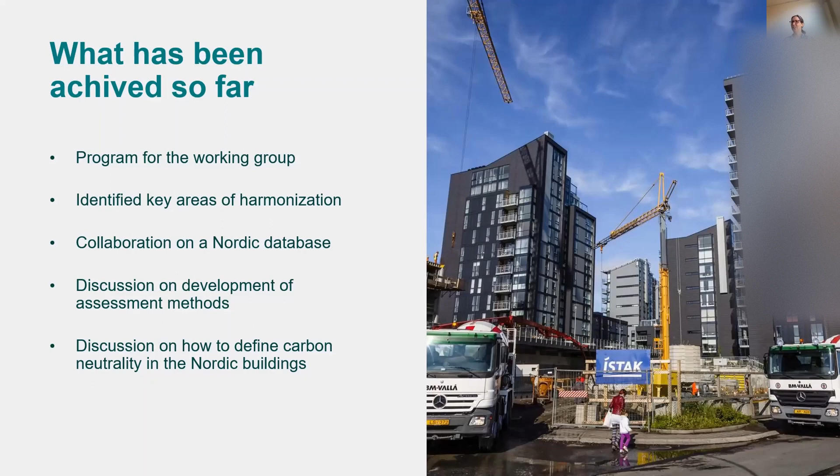Just start sharing my screen here. Like that, I hope you see it well in the right mode. It looks good. Perfect. So thank you very much for inviting me, and hello everybody, nice to be here today.

I will talk about this ongoing project we're working on for Boverket on reference values for climate impact of new buildings. We started this work in the autumn, and we won't actually have a report until the end of September, so we are in the middle of our analysis right now. I have not promised to show, and cannot show, any sharp results from this study yet, but I hope to provide you a good description of the project, and an understanding of what will be the output of this project anyway.

The main aim was to develop and propose a methodology for reference values regarding climate impact for new buildings, and also collect background data on buildings to be used for this development, and propose reference values. We have multiple aims with these reference values: to provide support for setting climate requirements in procurement beyond legislation, to create a baseline for following up climate impact on new buildings over time in the Swedish context, and finally to provide a basis for limit values if they will be connected to the coming climate declaration regulation.

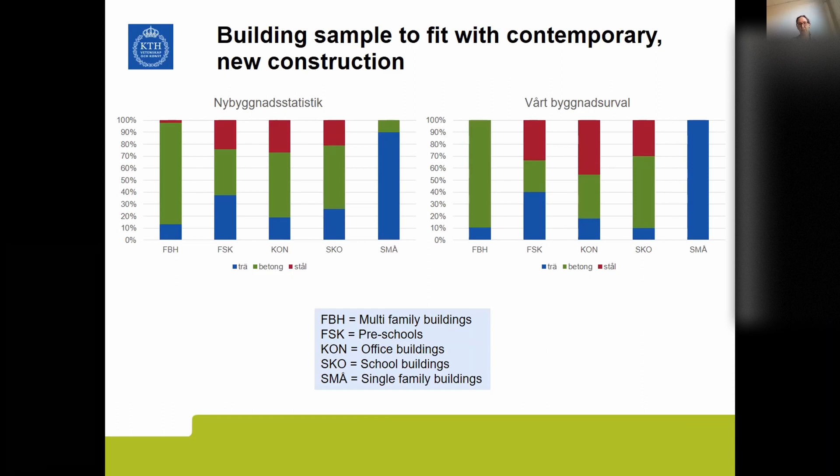In the work we have also looked at the current statistics of how new construction looks like, because we had an idea that if we see our sample become biased in some way, maybe we need to work with trying to adjust the reference values. In the end, we managed to include 4 timber preschool buildings here to make sure it's more representative of how current construction looks today. But this is just an example here I show.

So what will the reference values represent then? In this current project, we are only looking at the life cycle modules A1 to A5. The reason for that is, of course, that this is the main focus of the coming climate declaration regulation, so this is of most interest now to have a closer look at. But we have material, so it's possible to also calculate other life cycle stages later on. In the current project, until September, this will be the focus.

We are working with 2 system boundaries for building parts or building component coverage. One is the system boundary that the coming regulation will have, how it looks like when introduced in 2022 - main building elements, so the load-bearing structure, climate shell, inner walls, and potential basement and garage. But we are also looking at a system boundary to represent a more complete inventory of the entire building, which has also been proposed as a suggestion for developing the climate declaration regulation in 2027. Here it's primarily to add interior finishes and technical installations into the calculations.

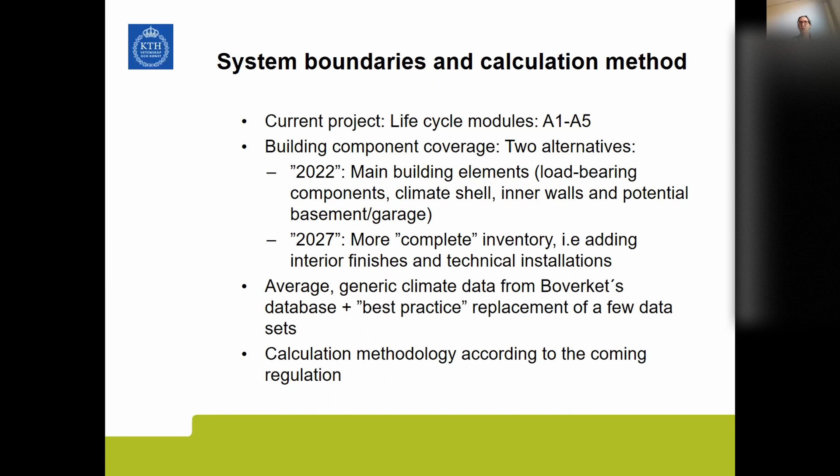We are also making a calculation that we call best practice - one way of trying to set up a representation of what can be done already today. This is done by replacing a few of the data sets here with greener alternatives. Apart from that, the calculation methodology follows the coming regulation.

So I will stop a little bit to talk about the background data here, because actually this project has had a very high focus on compiling and processing the background data, that is the building inventories for the calculations. We had a very high focus on trying to establish a uniform and high quality data set and methodology, to really make sure we have control over the background data to the highest extent possible, and also the possibility to set up the same calculation methodology.

So we have not been asking for ready-made calculations. Instead, we have asked for high quality bills of resources of these buildings. And we also set up very high requirements on these bills of resources from the data providers here.

Here we have asked for them to be based on cost calculation data in the first place, to really make sure that we have very complete inventories, and also as close to as built as possible. This is also done in relation to wanting to set up a method that is really compatible with how this is going to be done later on for the climate declaration regulation.

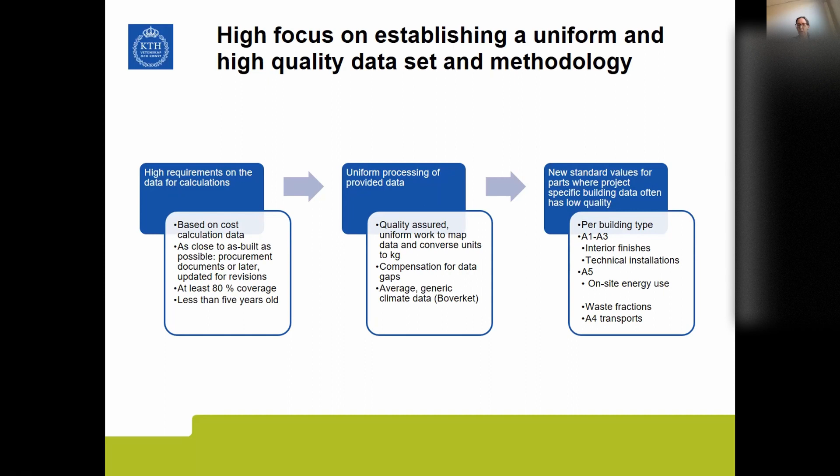So in this work, we have also been developing new standard values for some parts, and this entails interior finishes and technical installations and the on-site energy used in module A5. This is not perfect, but it's at least one step forward in the Swedish context of trying to set up quite solid standard values.

Just to give you some kind of hint here on this quality control process: in the left lower corner here, this was the first graph we took forward, and in the other corner with the blue bars, we have the near-final diagrams for the buildings here.

As you can see, in the first one, we had buildings that were up to 1,200 kilo CO2 equivalents per square meter. And now we have the highest a bit above 400 instead.

So we have had a process where we have really looked neatly into the values, looked into different building parts, and made sure we see that the building parts are filled with information, and also looked at, for example, if the amounts of kilos for different building parts, of concrete for example, seems reasonable, things like that.

To try to set up this process, when we have detected errors, we have always gone back to the data providers to ask them to recheck or come up with revised values, etc.

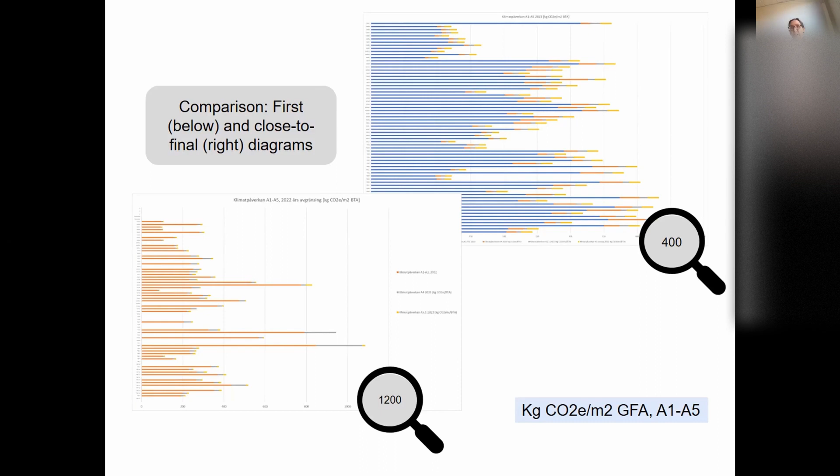All the lessons learned in this data compilation and processing has also been fed into the work at Boverket regarding developing the climate regulation more in detail, and is, I think, important lessons learned for working with how to set up the control in the end of the legislation.

Yes, so of course we can do a lot of analysis now with this data we have. One use of this is to come up with reference values. This is just to give an overview of what I see as the main reference values that will be produced here for Boverket. This will be actual average values for the different building types, and we are looking at these two different system boundaries, 2022 and 2027.

We also come up with this so-called best practice calculation, which means that we can give an understanding of if some of the most important materials were procured in a greener way already today in these buildings, how far can we actually reach improvement here.

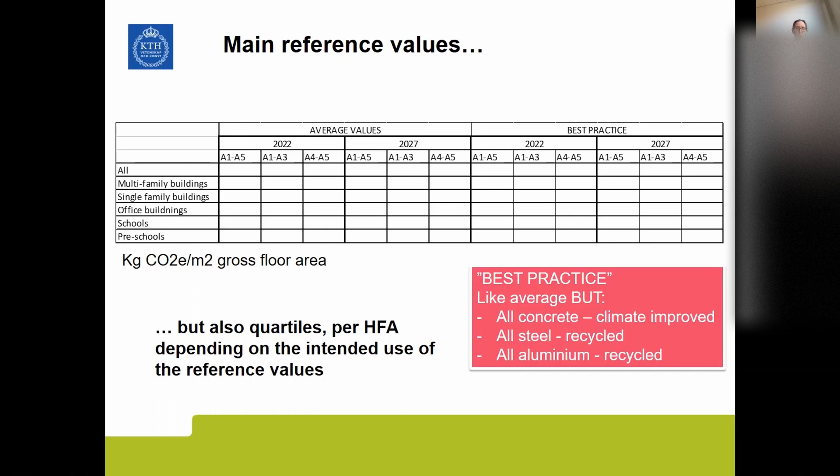But of course, starting for the discussion later on limit values, etc., we can also come up with quartile values, and we also look at per heated floor area. We also made such calculations, for example.

And finally, I will just try to give a preview of some short results and conclusions that we feel we can say already now, which may be of interest for the coming discussions.

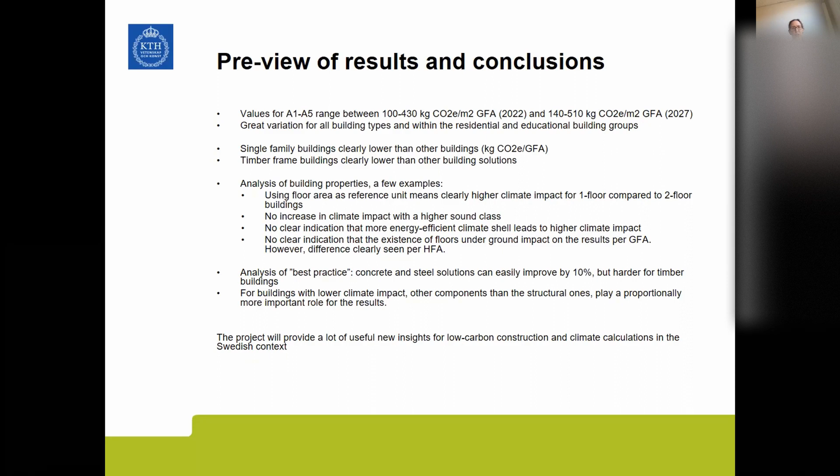Here, the single family buildings clearly come out having a lower impact per gross floor area compared to other building types. And also buildings with a lot of wood inside them come out clearly as lower. Of course, single family buildings in Sweden are built primarily in wood, so that's also a reason for this building type to be a bit lower.

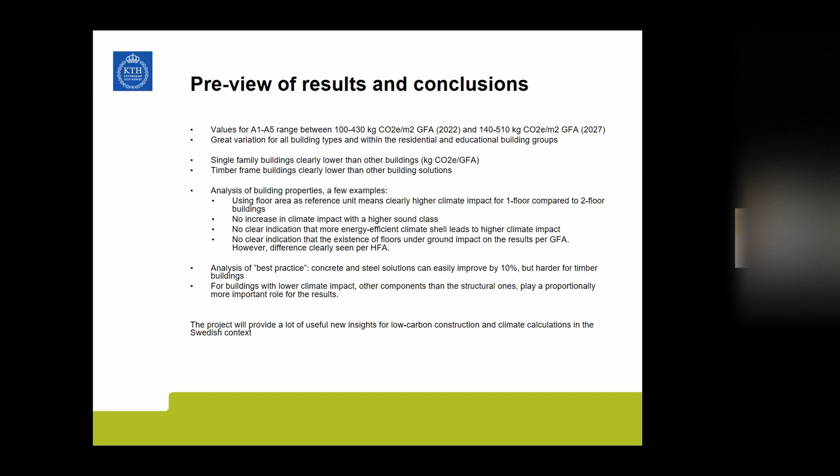We also look at an analysis of a couple of different building properties in relation to whether setting certain strict limit values would actually disqualify buildings with certain functional requirements. For example, does a higher sound class or a more energy efficient climate shell lead to a higher climate impact per modules A1 to A5? So far we cannot really see any tendencies of that in the material we have.

But of course it's not a lot of buildings we have, still no such tendencies. I should finish now, but maybe also say, in relation to improvement potentials out there, we can see that if starting setting requirements in procurement, for example as percentage reductions, it's evident since we replace concrete data and steel data in our calculations, that's the first thing you think about for improvements. But it's clear that a solution with a lot of concrete and steel can easily improve by 10%, for example, but it's much harder for constructions where you have a lot of timber. Yes, I think I'll stop there now.

Just shortly about us: we are a private company, predominantly we do software, but we also think policy is quite important, so we do selective low carbon construction policy work. We are about 55 people and based in Finland.

The work we did here is commissioned by the government. The findings here don't constitute government position, but what we think about it. The latest update of the report is dated the 1st of March, and you can find it on the government website, and I'm sure you can ask for it as well if you want.

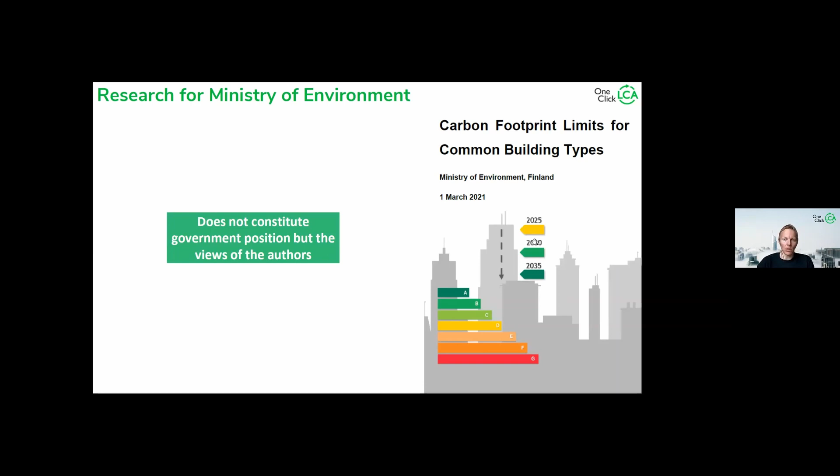What we did in this project is more or less 4 things. We did statistical analysis of projects, analyzing both real buildings that had already done LCA before. We studied energy performance certificates. We created reference models for 5 building types, and then we analyzed all kinds of reduction methods and sensitivity analysis scenarios on those reference models.

Unlike, I think the biggest difference here is that we sit on really a lot of data. I don't know exactly what is the amount of projects we have, but I would say it's well over 700 that we have in total. This is just the subset of projects we retained for Finland; obviously it's much bigger and broader.

We took the qualifying part of the actual building LCA process for Finland, and then we got from the government agency looking after energy performance certificates all the certificates between the beginning of the project and the revision of the energy code, since the energy code had been revised at a certain point in time, so older data would have not been useful. That's about 2 years worth of data or something like that. So for energy performance certificates it's everything, and for embodied carbon it's a sample.

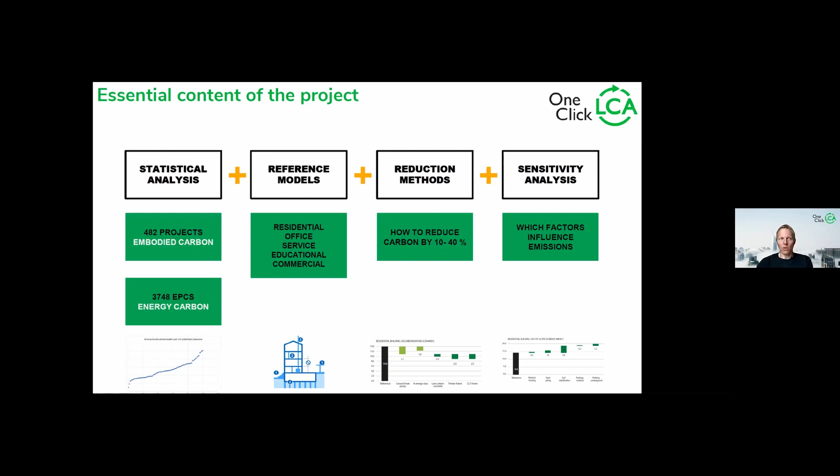And then I will talk about the rest in a bit more detail as we progress.

So we did the study in a few different ways. We started to look at variance of the assessments, then we analyzed and calculated out all the potential deviation sources. One of them is the foundation conditions. So we did the data separately with foundations or without foundations, so we can see what difference it makes for the total figures. The foundation question is particularly relevant because it may be a choice the government makes to include or not include it in the regulatory limit values, since it would reflect on the possibility to build on certain pieces of land.

We were targeting 5 building types, but because there may be future regulations, we also did statistics for some other building types which were not in the scope of the study.

If you look at the data, you can see we have the 95% confidence intervals here. Some of the bands are pretty narrow because the data is quite consistent and the sample is fairly large, whereas in others, where the sample is quite small, there's quite a bit of bandwidth within the confidence interval.

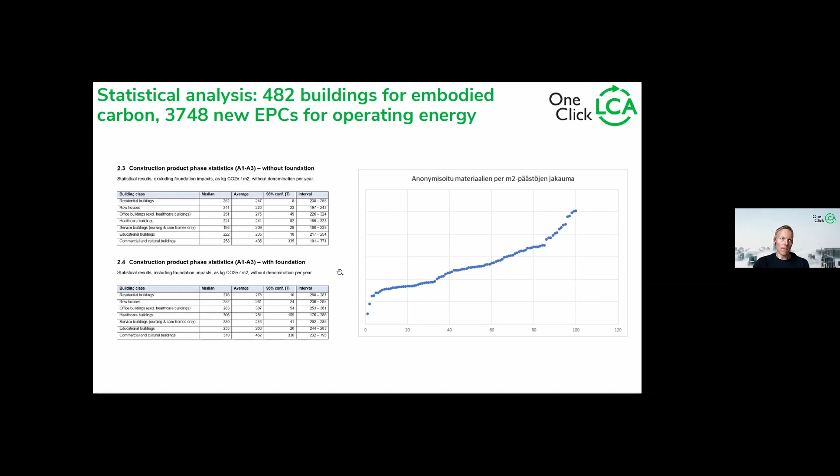So the second part is we have actual buildings, and the question is how do we make these scenarios. To make these scenarios, we need something which we can easily model. We can't go and build adjustments to the actual buildings - that would not be feasible with the time we had for this project.

So we created reference buildings. The reference building idea is something I think originally developed in Norway - quite a good idea in a way. It's basically the most typical building you would build for a building category.

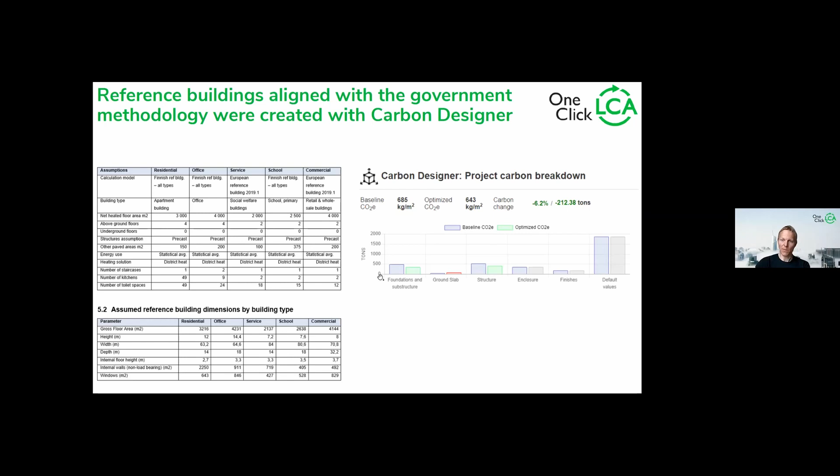We created the standard reference buildings for each of the categories and parameters. They are documented in the report, created with an early phase design tool called Carbon Designer. Then we used these reference buildings for each building category to create all the variants, which allowed us to have a feasible approach to doing the what-if scenarios.

When we normalized the reference buildings for 50 years per square meter, including the handprint, which in the Finnish methodology is a negative figure, we ended up with figures between a bit over 10 to about 18 kilos per square meter per year for service buildings, which have very bad energy performance in the Finnish building system as of today, on average.

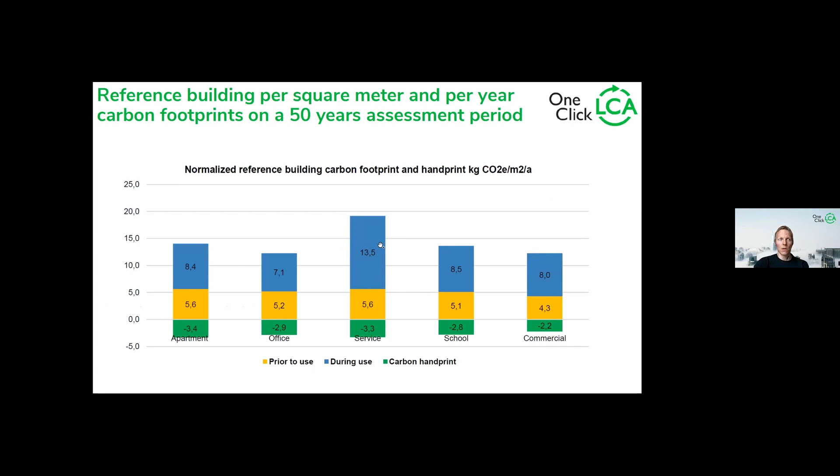And what we did then with the buildings is we calculated 2 particular areas which we felt - well, government felt and we agreed basically - would be of regulatory concern.

The first is out-of-scope elements. So if regulation chooses to exclude certain things, what will it mean for the purpose of the regulation, which is to reduce carbon footprint of the built environment?

The out-of-scope elements turned out to be very big because in many Finnish cities, they have been built next to rivers as everywhere else basically, and that means we have very interesting clay pits. So we have a lot of clay, and to build on that clay we have left - because all the good building spots have already been built - there can be very heavy foundations.

The out-of-scope elements impact was calculated for all building types. I think this is quite a useful exercise to understand what you should not exclude from your system, or what you need to require to declare if you don't set a limit value for it. So I would encourage considering this also in other Nordic countries if you're planning regulations.

The other is parking systems besides the foundation. Parking systems can have a very significant impact, obviously.

And then we have a few things related to location or parameters like that. In the Finnish system, zoning can require that you build a brick facade, for example, or that you have balconies. We may have other parameters dictated by the zoning, and not all of these sensitivity analysis scenarios are zoning driven, but some of them are.

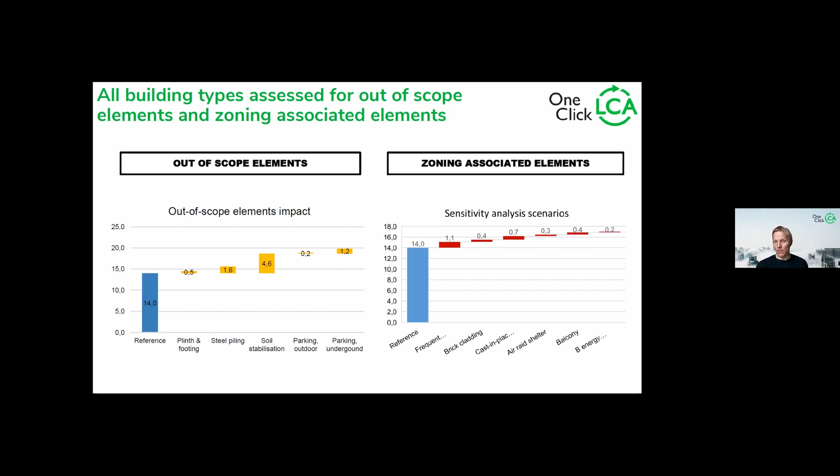And then we analyzed some carbon reducing measures. We analyzed just 5 measures, which are not design specific or particular good ideas, but macro level measures that can be scaled. In the energy system, we analyzed 2 measures: A energy class, and ground heat pump.

So when we set the proposed reduction targets for the building types, we can see that in most building types, energy measures alone do not hit the reduction target proposed. This is natural because we set the targets to be ambitious, so they would require a combination of different measures.

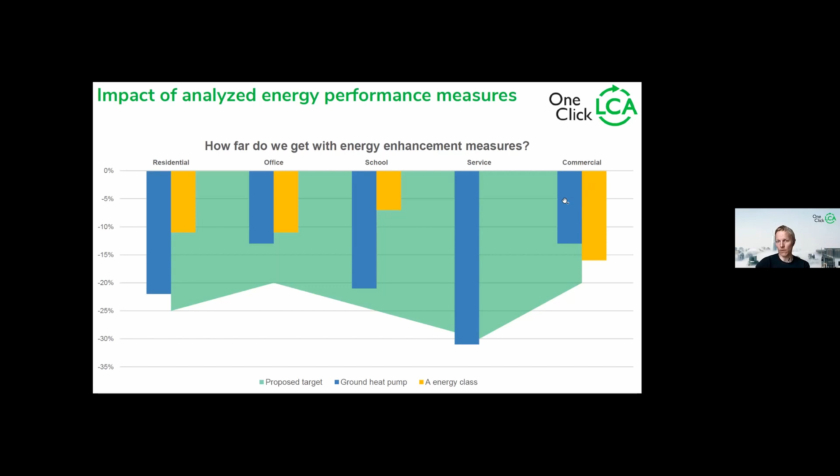When we look at the material choice measures, we analyzed 3 scenarios: low carbon concrete, timber frame, and CLT frame. We didn't analyze low carbon steel frame, as it's also not something you can use for all of the building types in question here, so it wouldn't be doable.

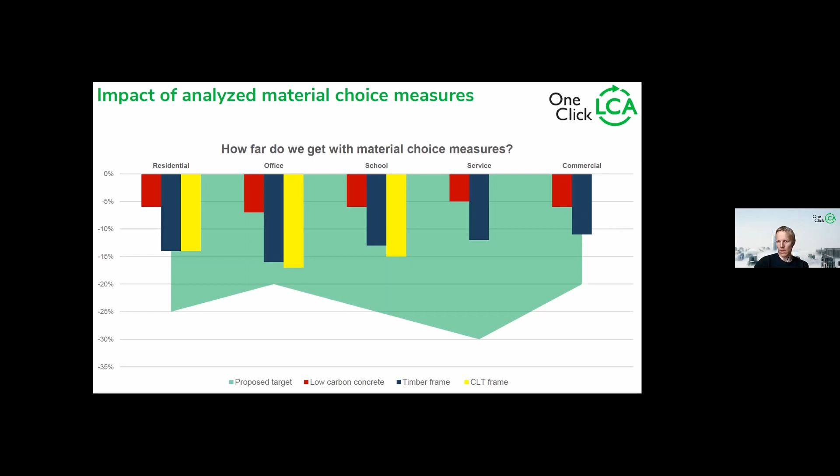We can see that the material choices themselves don't cut it either. So for this system, which encompasses both, every project would have to combine improvements on both fronts if these limit values are retained. But anyway, it seems clearly feasible, and there are multiple methods you could combine to achieve these limit values, which is important to provide an open market that doesn't require a certain technology, material, or system to be used to build.

So it's a market-based system in that sense. Finally, we ended up with proposed limit values. We started with the reference figures, variance outside the project's control, and then the proposed decarbonization, proven feasible for the building type in question, between 20 and 30% by building type. We rounded the figures to simpler numbers, and our limit values are from 10 to 14 kilos per square meter in carbon footprint. Carbon handprint is not deduced - it's reported separately and not part of the figures.

However, the government is updating the methodology and has issued, in March, a generic database. Because the study was done before this, those updates are not yet reflected, and this work has to be updated prior to issuing regulations. So, so much for that.

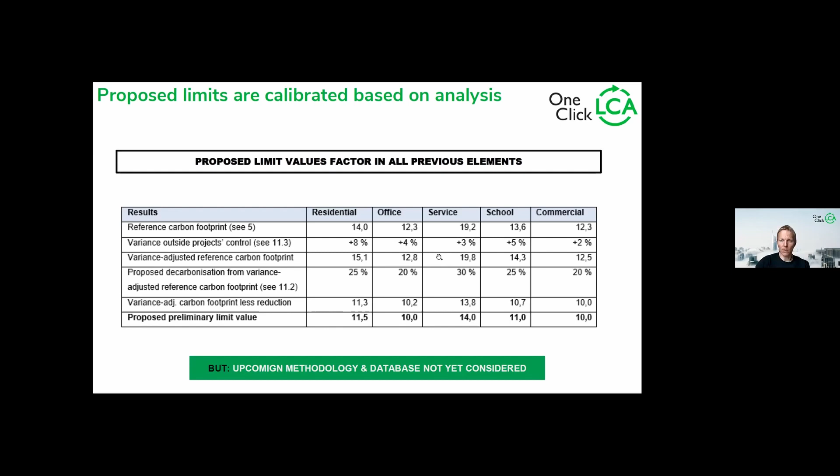That's it, I think, for the Finnish study. If you're interested in benchmark figures for Finland and Sweden, you might also be interested in this - since we ran out of things to do in March, well, not really, but this was quite an interesting exercise, so we decided to do embodied carbon benchmarks also at the European level. For this, we took about 15,000 building LCAs, but eliminated a huge number based on different statistical methods, retaining about 3,700. We grouped Europe into 3 regions and 5 building types.

This data is going to be freely available for anybody who wants it, next week on Tuesday. There's a webinar about it as well, so maybe it's interesting for you.